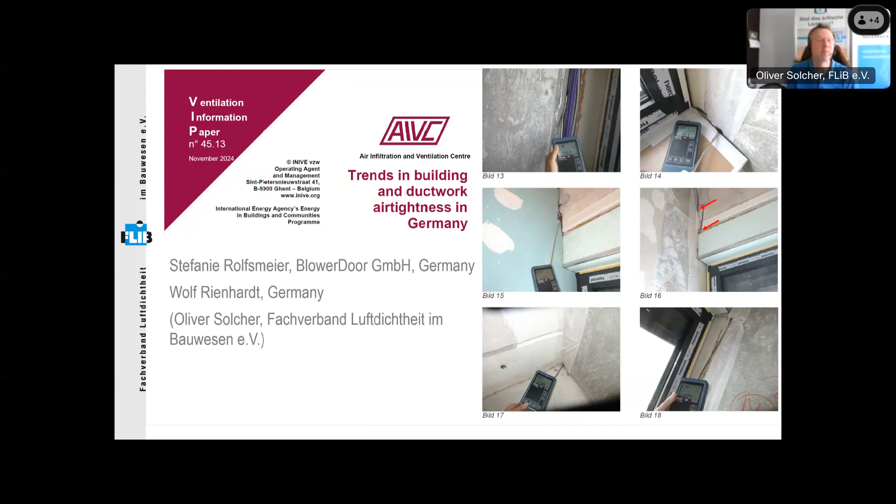So just a reminder for us, the reason why we test buildings or the airtightness of buildings is not just to get a value that we can put in our EP calculation, but to check for leaks, find them, and avoid them or heal them. Of course, that's not in the paper. In the paper are some figures.

We have 21 million residential or non-residential building stock in Germany in 2021, 19.4 million residential and 2 million non-residential buildings. That's what we deal with.

One main issue is that the building of new buildings has, well, stalled in the last couple of years due to the pandemic that we had, due to the recession that we have. And we feel that as well in the building testing, our members report that they test fewer buildings because the building market doesn't evolve but stalled.

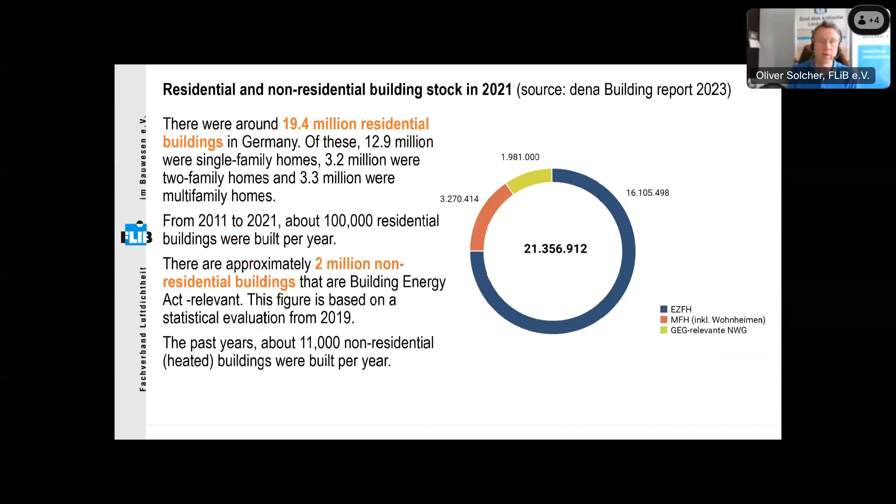And I think in terms of what is the goal, we need to get to the refurbishment. And in refurbishment, we actually don't have any figures. All figures that we produce in testing buildings are mostly new buildings, and the huge market will be the refurbishment that we are all facing all over the world. So actually that's the market, the whole share that we see here. Those buildings need to be improved and tested.

So, well, I don't have the timeline as my Estonian colleague had. Of course, we started a long time ago. The first benchmarks were set in the EP regulation in 2002, the Energy Buildings Act. Now, it has been reformed several times. Now it's called GEG, and it sets requirements to have a certain quality of the building envelope. It needs to be built airtight according to the rules of technology.

So that's mandatory. You need to build it airtight, but no test is mandatory. How can you be sure to have an airtight building if you don't need to test it? But that's the contradiction we live with, and we try to spread out that testing the building is a good way to prove it is airtight.

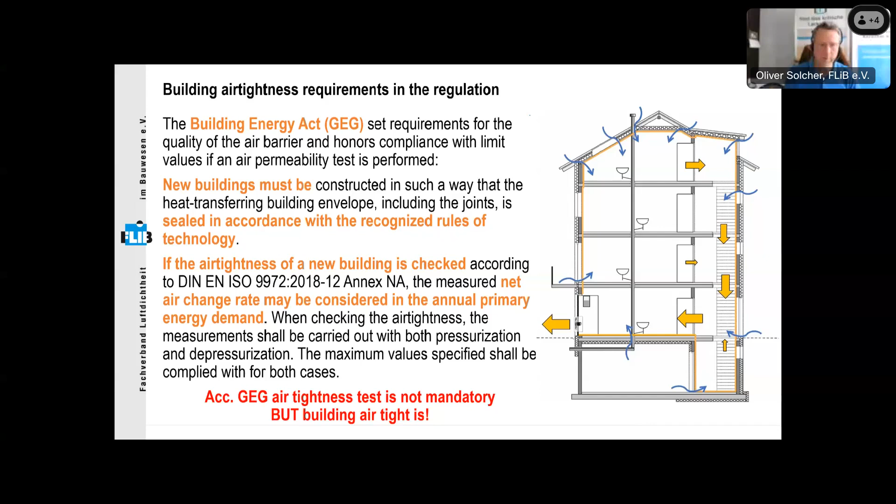But if you test the building, you can set the measured value instead of the default value in the EP calculation. So it's not mandatory, but if you test, you improve the energy performance of the building, if you do not exceed the limit values. The limit values are separated in buildings below 1500 cubic meter internal volume and above. And if you're below, it's the N50 value. You will notice we call it NL50 value.

We have the index L because we have a national annex to the 9972, where we have a different volume defined that is in line with our EP calculation, where we calculate with the internal volume without the inner structure. Just a moment to have the pointer here. We exclude the internal building construction from the inner volume.

So the NL50 value for buildings without ventilation is 3 air changes per hour. And if you have a ventilation system in smaller buildings, it's an NL50 value of 1.5 you're not allowed to exceed. In larger buildings above 1500 cubic meters internal volume, the air permeability is limited. So the leakage flow is put in reference to the building envelope, and it's 2.5 cubic meter per hour per square meter for buildings with a ventilation system, and 4.5 for buildings without a ventilation system.

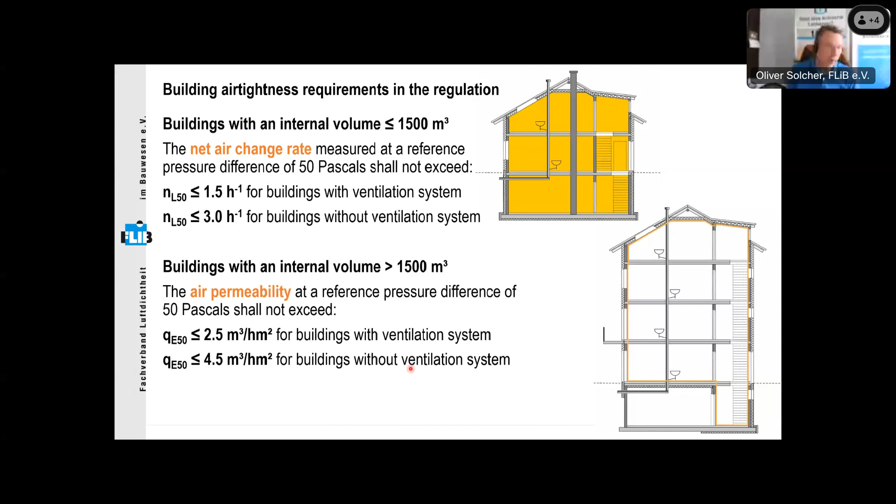And of course, we have incentives for building airtightness, the funding program of our government, Bundesförderung energieeffiziente Gebäude, funding program for energy efficient buildings. And some programs require airtightness testing. As I said, in EP regulation it is not mandatory, but in order to get that funding, you need to test.

And regarding the point in the EP regulation, you need to build airtight. For all funded programs, you need to have an airtightness concept. So they put the focus on the planning process of the airtightness. You need to plan it, but not for all buildings you need to test it.

In passive houses, you need to test the airtightness, and the benchmark, as you might know, is 0.6 air changes per hour. The N50 value must not exceed that value. In the DGNB, the Sustainable Building Council, there are various limit values depending on the building type and its use.

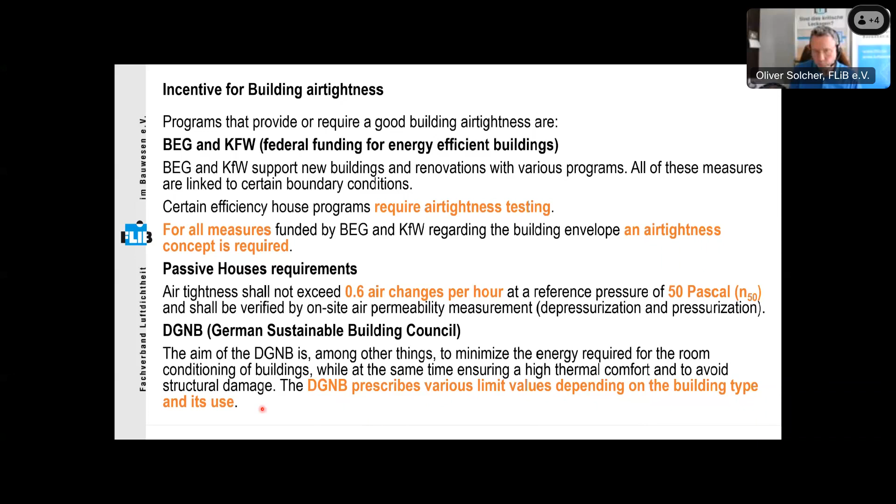If we go to the energy performance calculation, you notice that the values you put in the equations are quite smaller than the limit values that we have in our regulation. So if you test, you're allowed to set in the calculation smaller values.

The value for the N50 value will be 3 for buildings without a ventilation system, or 1.5 for buildings with a ventilation system. And of course, you're allowed to put in the measured value as well. But if you test, you are allowed to calculate with the default value, if your building does not exceed the limits of the EP regulation.

So in larger buildings, it's the Q50, and it's 3 for buildings without a ventilation system, or 2 with a ventilation system. If you don't test, you have to calculate with higher values in new buildings, or class 3 would be refurbished buildings, and class 4 will be refurbished buildings where you have obvious leaks in the building envelope, like leaky windows.

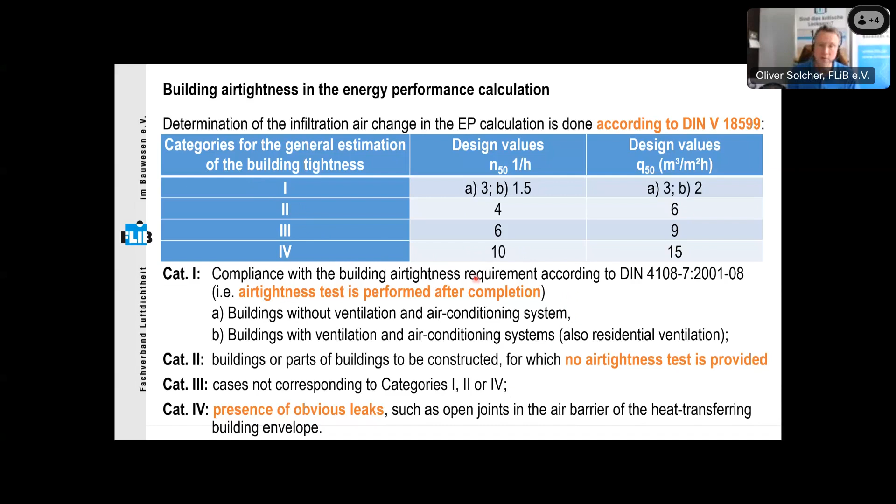So, as in the introduction, it was said that it is not mandatory to test, but if you don't test, you have to calculate with a higher leakage rate, and this is what I give you in that sheet. I transformed the N50 value in the infiltration rate.

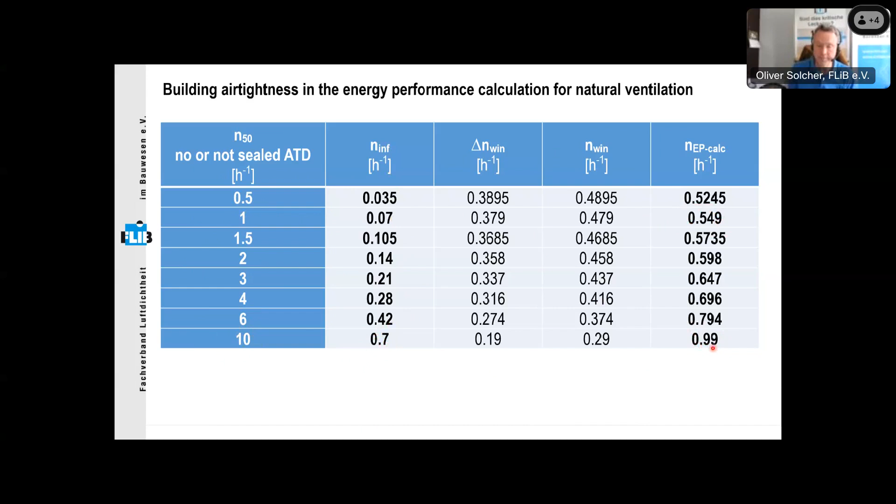You see, if we have an N50 value of 1, we have an infiltration rate of 0.07, and in the equation for the total heat loss over ventilation, it's an air change of 0.55 that you have to put into the calculation. If you have an N50 value of 10, the infiltration is much higher, but the air change rate that you put into the calculation for the total heat loss over ventilation is close to 1. It's 0.99. Just to give you an impression.

It is pretty close to method 1, but there are certain things you are allowed to seal if they haven't been mounted yet. You're allowed to seal the opening for the dryer perhaps, or for the stove. You need to test with under and over pressure, and the pressure drop within the building must not exceed 10%. It was pretty important for us to include that in our national annex.

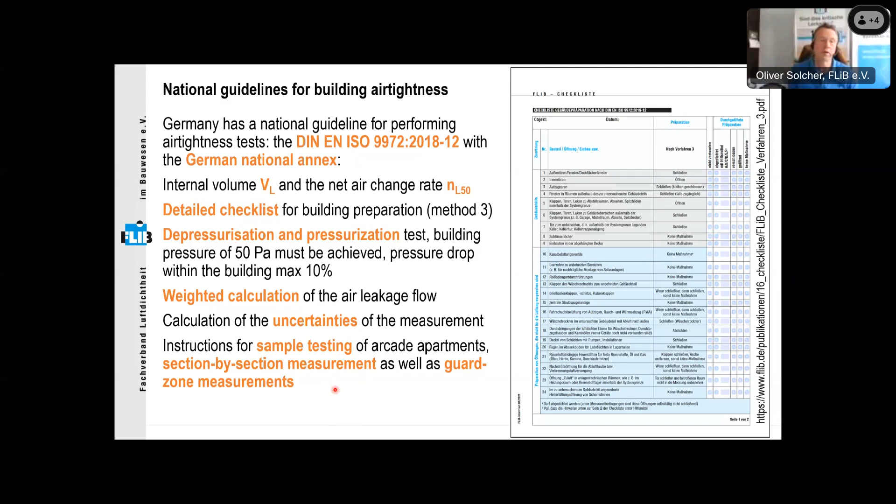We have in the annex a sample for a weighted calculation and the calculation for the uncertainties of the measurement, as well as an instruction how to do sample testing. It is allowed to test arcade apartments with a sample in our EP regulation. And it's an instruction how you do section by section measurements or guard zone measurements, if you need to test buildings in sections.

Ductwork air tightness. Well, I'm not really into ductwork air tightness, so I'm just quoting what I found in this AIVC paper. In our EP regulation from 2007, there were requirements for energy efficiency of cooling and air conditioning in case of renewal or new constructions, but it does not contain classifications for air tightness of ducts.

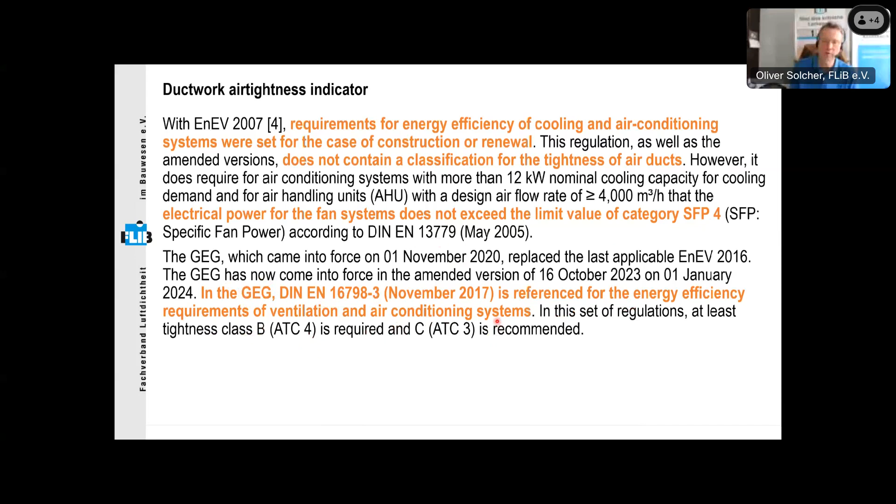And you have a limit value for the electrical power of the fans. This is SFP4 according to EN 13779. And in our actual EP regulation, the GEG, EN 16798-3 is referenced, and there at least we have a requirement of class B or class C as a recommendation for the ductwork airtightness.

But in funding, there is a requirement for the proof of the tightness of the air duct system. So if you apply for a funded program, energy efficient building program, you need to test the air tightness of the duct system. But you only need the proof according to EN 1507 or EN 12237.

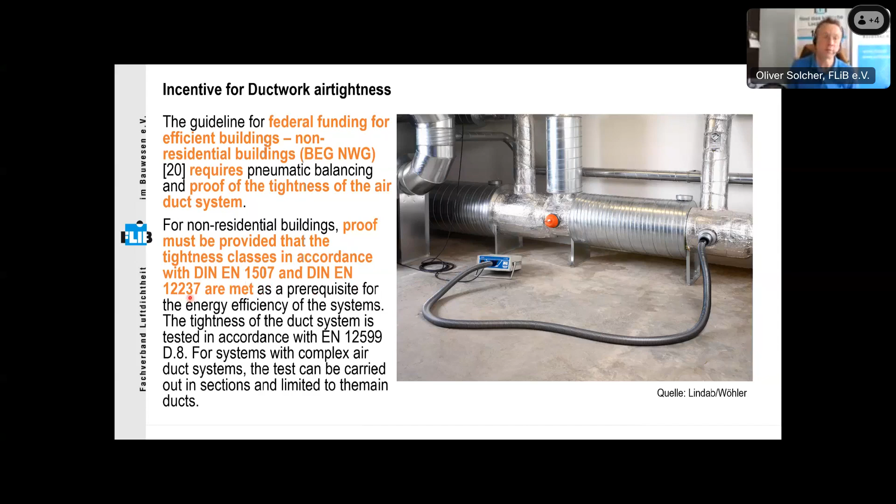And also in calculation, the ductwork airtightness is not taken into account, just over the airflow that needs to be increased in order to get the airflow that is owed. And if I read our EP calculation standard, it says the heat loss due to leaks in the ductwork can be neglected if it does not exceed a certain temperature difference. If it's below 10 Kelvin, the heat loss due to leaks in the ductwork can be neglected.

So I think we need to work on that ductwork airtightness. There's a lot to improve there.